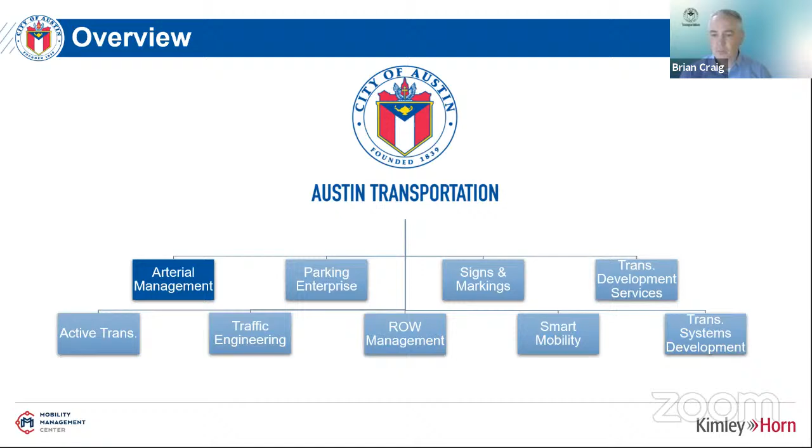I'm a little biased, but I do think that our MMC is the centerpiece of our department, both technologically and how we get to affect citizens' lives every day. Just as an overview of our MMC, we oversee a sizable number of critical arterials—roadways that we've deemed the most essential within the city. I think it makes up approximately 200 miles of arterials out of many, many more than that. We monitor traffic flow, we make timing adjustments as needed, and we do so remotely using the KITS system.

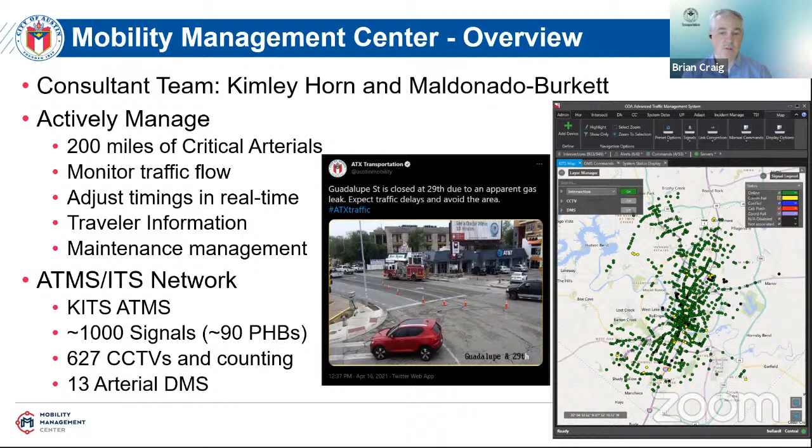A little bit of history of our MMC. Although this predates me, there was an election in 1986 in which, from the best that I can tell, was the first bond truly devoted to traffic signals. As part of that bond, we started deploying communication to our traffic signals, and that was, at the time, copper, as fiber really wasn't an option back then.

From 1986 through the 90s, it was really an expansion in which communication was brought to more of the traffic signals. As part of that, the city really standardized on the 170 controller platform, which was an upgrade from some NEMA cabinets, but also a lot of electromechanical systems. Communication to those traffic signals was great, but it certainly wasn't what we expect now as far as CCTV cameras or anything to that effect. Really, it all came into a very small office that was less than 20 by 20.

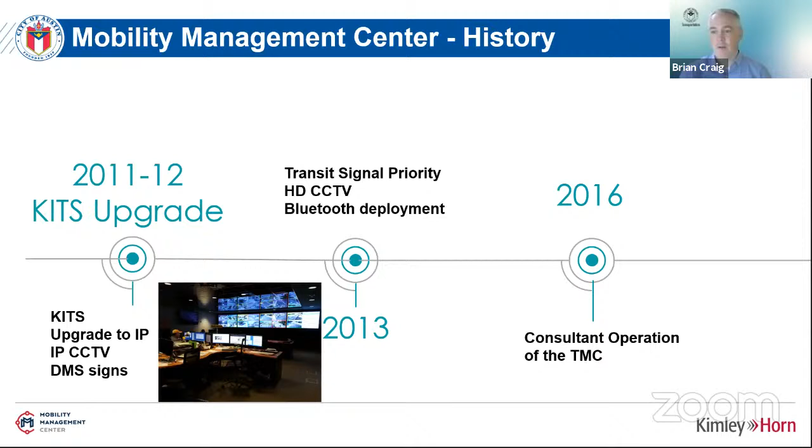We had been using KITS, and we incorporated our Next Phase software into it. But there were just a lot of things we couldn't do with the Next Phase software, which at that point was 15, 17 years old.

So in 2017, we put out an RFP to upgrade our signal firmware. At the tail end of that year, we selected D4 and began incorporating that into KITS, making some minor modifications with them.

2018, we're on the move. We relocated the TMC to a larger facility with all the growth within our division. We had outlived our old facility by probably a decade, so we moved into a larger facility with both our signal engineers and signal technicians. In the process, we rebranded our TMC to the MMC, Mobility Management Center.

We continued to make modifications to our new space, and we installed a new video wall consisting of 22 large 65-inch monitors. Strangely enough, that was a downgrade from our 80-inch monitors, but previous to that we only had 4, so we certainly increased our real estate.

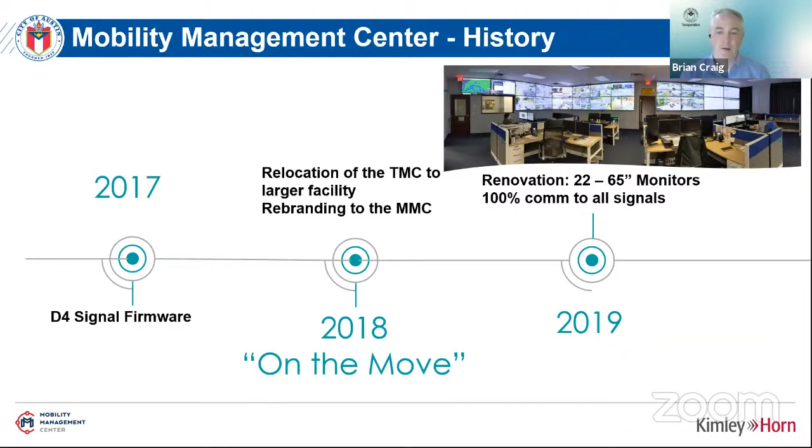And then 2020 hit. We all know about 2020, but prior to COVID, we had started an arterial coordinator program, and I think Lance will be able to touch on that a little bit. I don't want to say it was modeled under RTOP because it was much smaller than that, but it was really identifying 3 test corridors for us to pay more attention to.

That was in January, February, and then COVID hit, and we moved to remote operations. Late last year, Lance and some others started staffing the MMC again, so we're slowly getting back to normal.

This year we have some additional upgrades in the works: improving our video management system, video wall controller, and overall improving our situational awareness. In addition, we are revamping our communication network again to be more mesh-like, to distribute some of the high-def video we get from our 600-plus cameras.

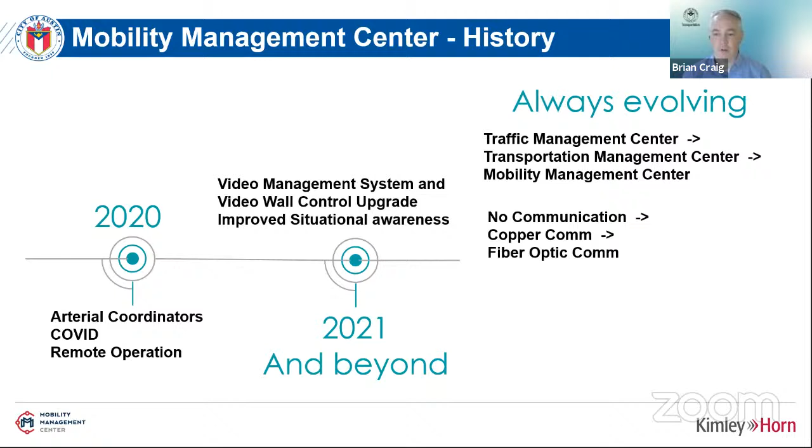Likewise, the way I look at it is you're always looking at improving. There was once a time where the only way to make adjustments to intersections in the field was to drive out there, and then slowly but surely we improved communication from copper to fiber optic. Now it seems like there's nothing we can't do, but as time progresses we will continue to make incremental improvements. Next slide, Lance.

So we have our normal day-to-day operations, but we also have special events, and we have our fair share of them within the city. We have numerous smaller events that go on, pre-COVID, on a weekly basis throughout almost the entire year. Really, the only time special events take a break is during the hottest parts of summer.

South by Southwest just engulfs downtown for 2 weeks in March. We have ACL, which is multiple weekends in the fall, and then there's UT football games. In about 3 weeks we'll have our first Austin FC home game, so we're all very excited about that.

We've also been having a Formula One race in Austin for the last 7 years, I believe, and this year we actually had our first NASCAR race. So we staff the MMC for all of those events, whether it be on the weekend or late night. Next slide.

PHBs. I think this is one of our more successful programs as far as the public goes.

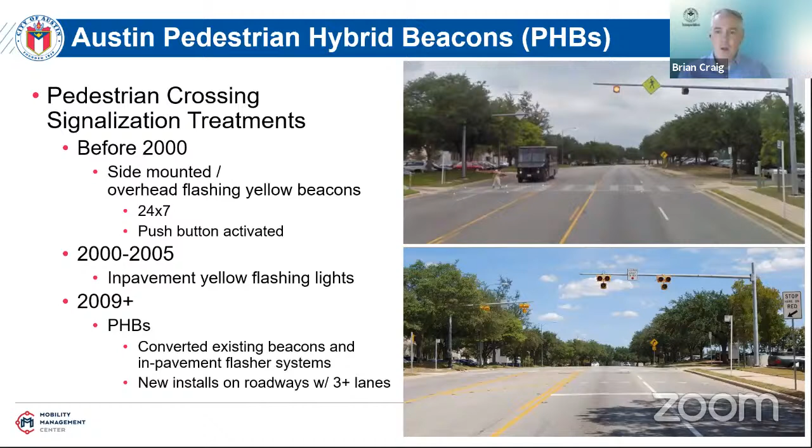So the MUTCD, I mean, you can read the definition of what a PHB is, but they provide very little guidance as far as how they should be used.

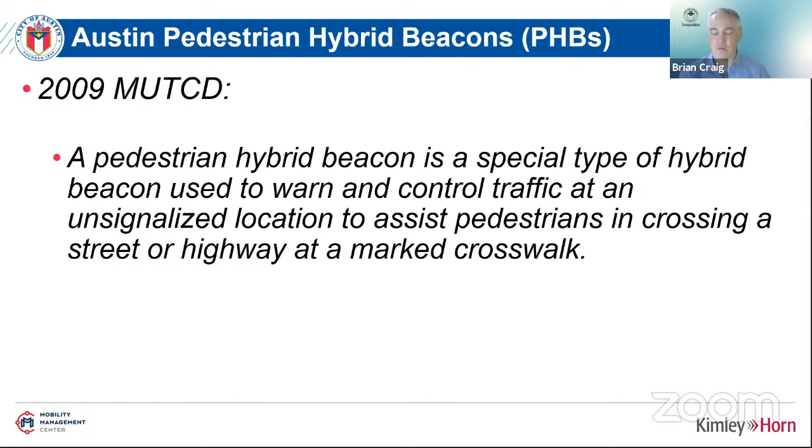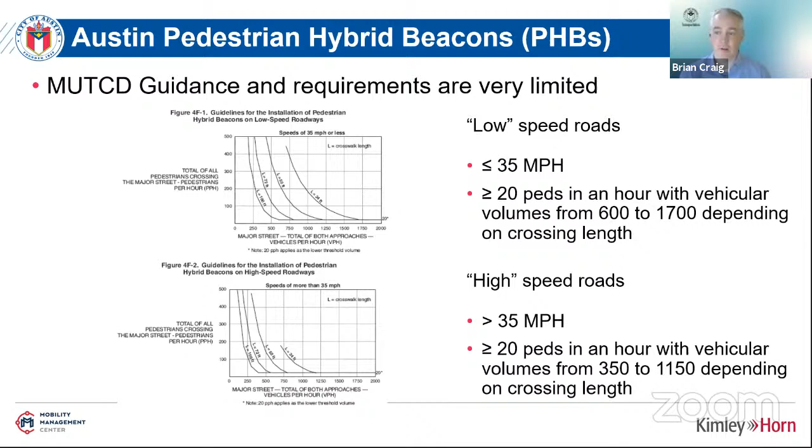So one of the things that became very apparent to us is most of the locations we studied did not have 20 pedestrian crossings per hour. And internally, we're asking ourselves, why were there so few crossings? And the answers were not enough gaps. I mean, realistically, if there aren't gaps for people to cross traffic, then people are going to find another way of getting across the street.

So as part of that, we really did some brainstorming, and we just decided that we like this traffic control. The public likes it. And so we just decided to use engineering judgment when we measured gaps, and there were fewer than 20. I mean, if there were less than 20 gaps in an hour, how could we expect there to be more pedestrians than that?

So really, we've looked at adjacent land use, the presence of bus stops, and future developments when we go ahead and put together our PHB studies. And we've been very liberal with our decisions as to whether or not to install a PHB.

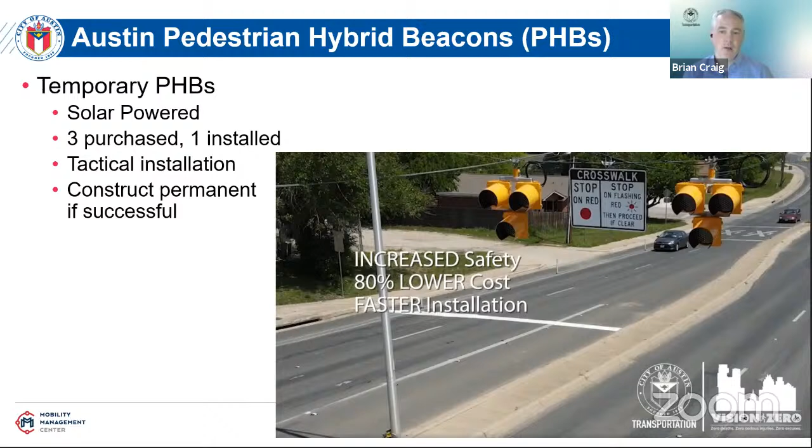Recently, we've actually procured 3 solar-powered PHB systems. We've installed the first of those at a location where we do have grant money to install a permanent PHB, but just based on the grant process, it was going to be another 2 years before construction would start. So we thought this would be a good opportunity to get one installed prior to that. And we have similar plans for the other 2.

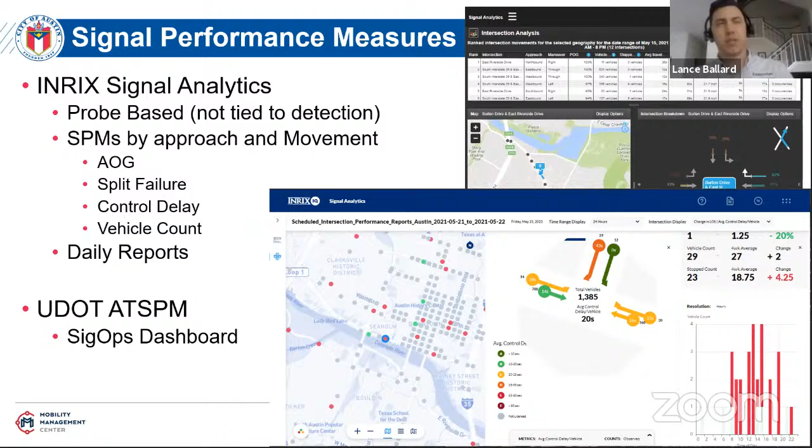Recently did a study on Riverside Drive where we were able to show that even though we took lanes away to implement transit priority lanes through some signal timing adjustments and things, we were able to keep traffic performing in basically a similar manner than before, and that's without having to reconfigure all the detection to get all of these statistics.

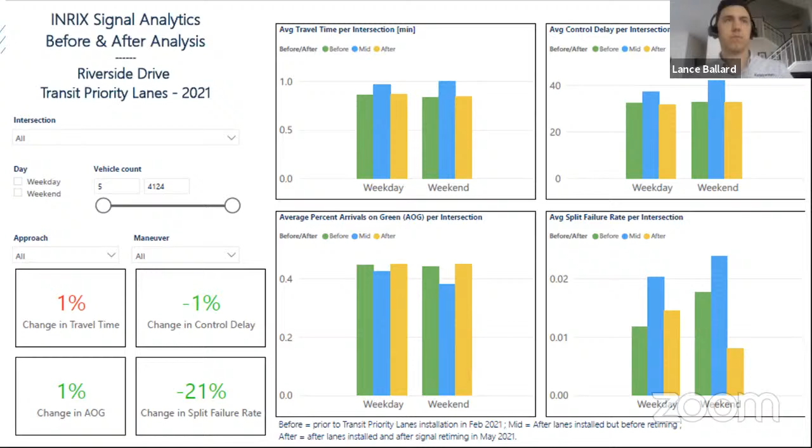We're also tracking—sorry, my headset is beeping in my ear that it is dying. If that is the case, I will try to switch over to microphone from my laptop. Hopefully that does not occur, but I'm sorry, I was distracted there for a moment. If that does, forgive me.

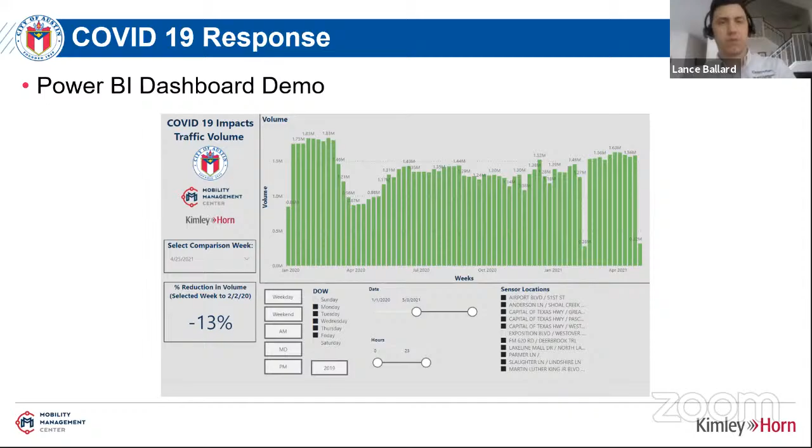Throughout the pandemic, we were using Power BI, which you just saw me showing with the Riverside Drive comparison, to track changes in volume, travel times, and all sorts of things for COVID. So I'm briefly going to see if I can do a live demonstration of one of those dashboards.

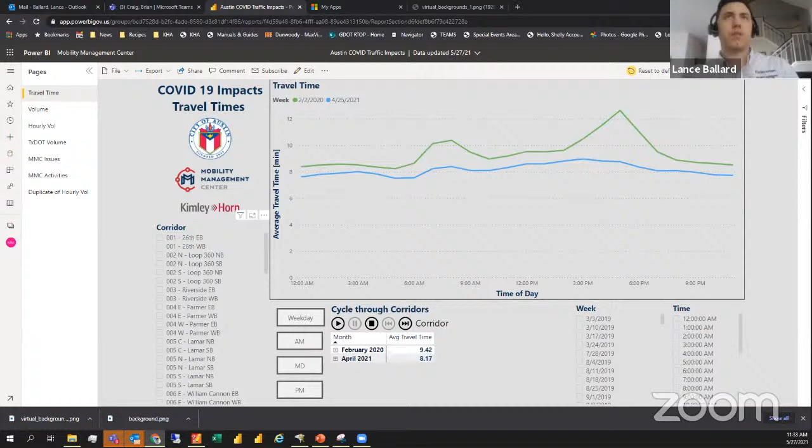Here you can see that we've pulled in lots and lots of data, more than you'd ever want to chew on in Excel. This is INRIX travel time, and we're pulling it in for all of our different corridors across the city to get average comparisons to the green baseline of February 2020 pre-COVID, and the blue line, which is a couple of weeks ago. I can look at specific corridors and compare them to see our AM peaks or PM peaks starting to come back.

I got tired of clicking through all those, so I found a quick way to just cycle through all of them. We're able to check this easily each week, and also report back to other parts of the department that control right-of-way permitting, construction coordination, and stuff like that, because we opened up the time that you could be in the roadway for construction during COVID, since we saw volumes decreased by roughly half at its low point.

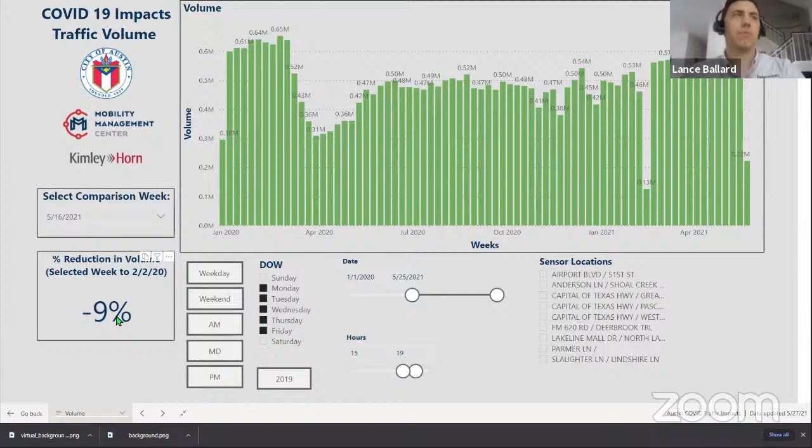Here you see volume week by week, taken from our GridSmart sensors across the city. We grab about 40 gigs of data each week when we run this, and it populates in this report. We can look at weekday versus weekend, AM peak, all those sorts of things, and see that we're roughly within 10% of pre-COVID levels. But if you look at just the PM peak, it's actually 9% right now as well, but AM is more like 25%.

So it's still down significantly. And if we look at that by hour instead of weekly bins over the year, you can see that AM peak just isn't what it was. This helps us do a lot of things—inform other departments that work with right-of-way permits, and also helps us within the Arterial Management Division in the MMC to adjust signal timing and get a better sense of where traffic is picking up, where it's still not back, more than just with our naked eye. We're able to do this quickly using this.

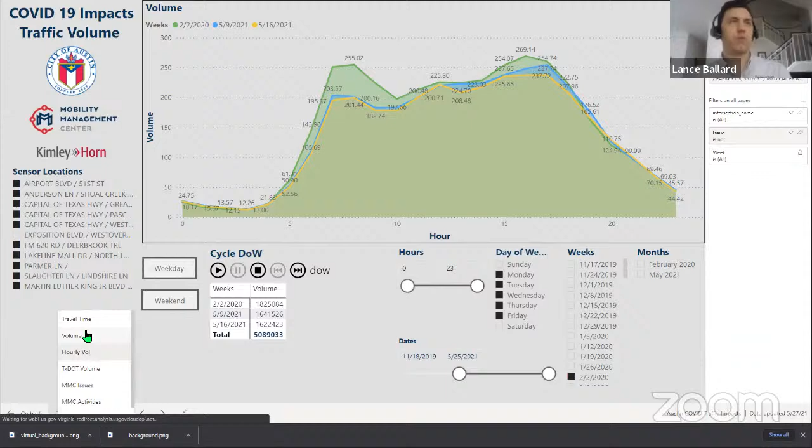When COVID hit and we had that huge drop off in volume in March and April of last year, we quickly used KITS to run alternative timing plans to about 85% of our signals—about 850 out of 1,000, so it makes percentages nice and easy. If you take the 10% out that are PHBs, it's probably even more than that.

So we were really aggressive in changing the timing plans to better accommodate lower volumes in traffic, so that we could decrease pedestrian delay by lowering cycle lengths and better fit our timing patterns to the actual volumes we were seeing out there. And since then, we're now at about 30% of our signals still running override plans, I guess you could say, during the AM peak period.

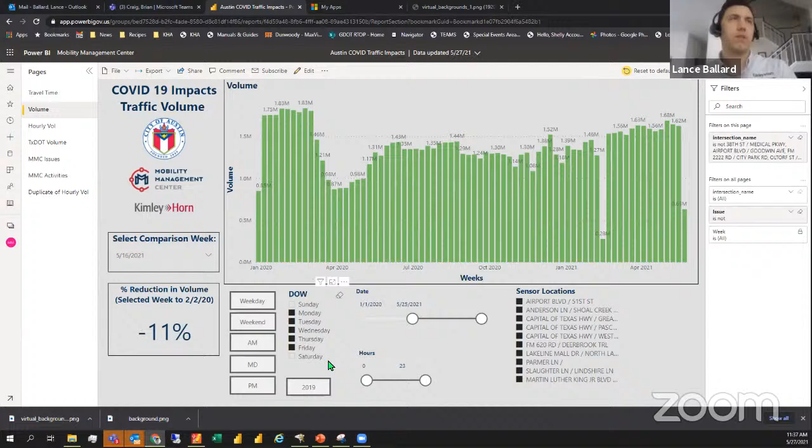While most of the city, pretty much all but downtown, is back to running its normal PM peak period, it's a little bit better fitting at this point. So Power BI has been a powerful tool for us to track COVID and do other things as well. Let me jump back into the presentation here and keep rolling.

In February, we were hit with a pretty dastardly snowstorm. I was there in Atlanta in 2014 for Snowpocalypse - take that and extend it for a whole week, and that's what we were dealing with. Nobody was really prepared. We were as prepared as we were for any sort of event, but Friday the 12th of February was our last day above freezing until the following Friday.

We had 7 inches of snow, which broke all kinds of records here in Austin. Had a low of 0. It was just bitterly cold. Power outages, water outages all across the city. People were asking us what's happening with the signal system. We're like, well, if it has power, it might be running. If not, it's going to be dark because no battery backup system will last that long.

It was really Thursday that things started turning back on, Friday in earnest. And we used Power BI to track a lot of that.

We linked it up with some of the data we were getting from KITS, and we could have a dashboard that updated every hour during work days, so management could see how many signals were currently in flash, how many dark signals we had, how many total were in flash, how many we'd restored. It was great for us as managers in the MMC to be able to quickly stand this up and share it, so we wouldn't have to spend as much time answering questions and catching people up to speed. We could be tactical, focus on resolving issues, getting technicians to the field.

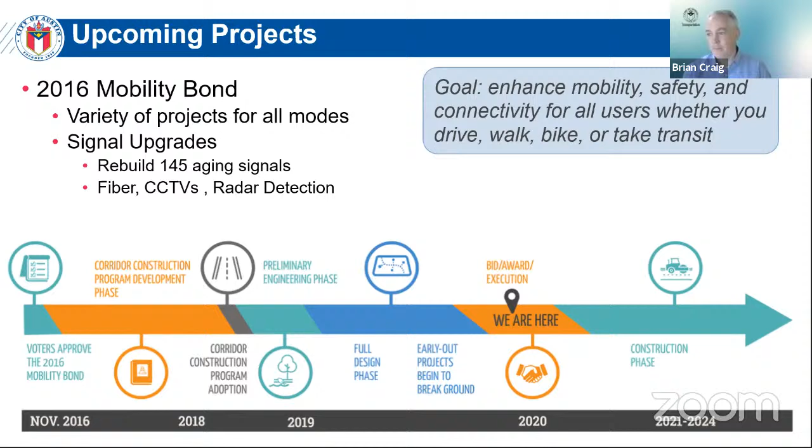Next slide. That's a project that's ongoing right now, and another project we're just about to get started on is the smart priority project, which will improve the centralized transit signal priority system we have right now, and completely rebuild, reimagine, our emergency vehicle preemption system. Currently we have about 100 intersections with the old-fashioned optical transmitter on fire trucks and emergency vehicles, and receivers at intersections. Ever since we installed those in the 90s, we've always had maintenance issues with them.

So when we rolled out our TSP system back in 2014, the proverbial light bulb went off: why can't we do this with fire trucks also? Through various conversations with them and digging down, they all have AVL systems on them, already tracking their vehicles. So we're working with them on a centralized system where we'll get their location data second by second, so that we can preempt signals through our own servers, communicating with the traffic signals through our own fiber optic cable. We won't need any type of hardware in the field to do that, and we see no reason this won't be a citywide program.

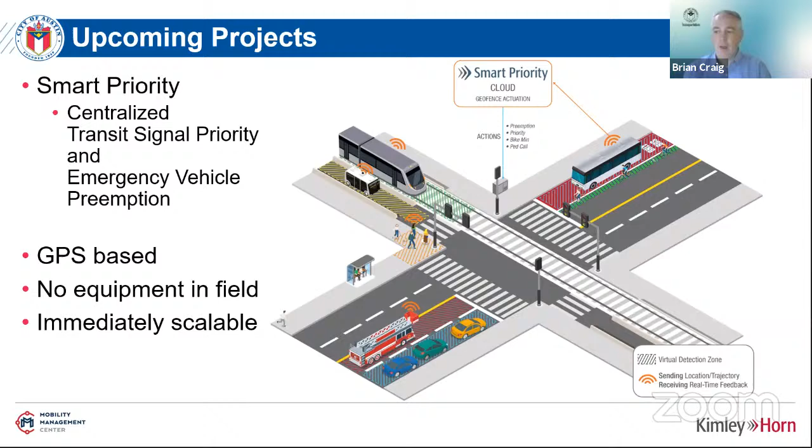Next slide. And then, of course, the biggest one of all: last year we had a rail election that finally passed. We've had numerous ones previously that failed, but this is a $7 billion bond for multiple rail lines and new BRT routes, and this is just going to be one of those things that keeps many people active on the project for most of their career at the city. Because if it's like other rail projects throughout the country, by the time we're done with this one, I have little doubt there'll be subsequent elections to expand it. But those are some of the projects coming up that will be keeping us busy.

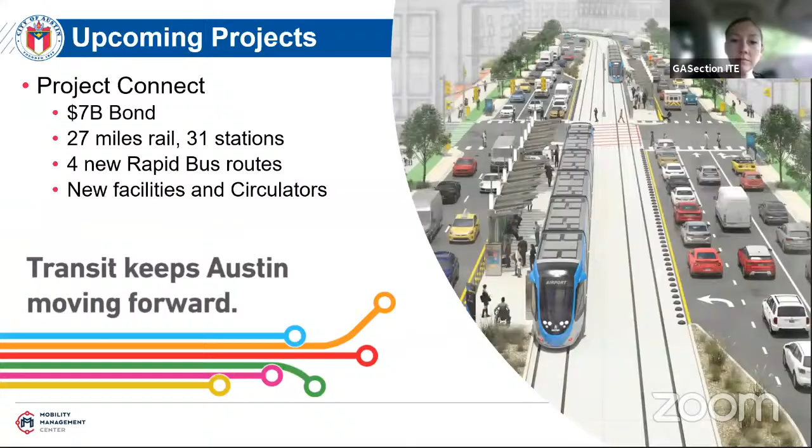Yes, it's one of those things where trends in pedestrian crashes aren't very evident. Thankfully, unlike vehicle crashes, there are very few pedestrian crashes, so there typically aren't any trends at the location we put PHBs at, is the short way of putting it. We certainly have put them at locations where we've had a fatality, but unlike vehicles, there generally isn't a telltale sign that there are ongoing crashes at this location. Most of the time, it's more of an observation where it's difficult for pedestrians to cross the street.

In the city, we have a Vision Zero group that actually helps look at a lot of these things. It's not just us doing crash studies. We have access to the crash data. Some of the reports we're pulling in for that Arterial coordinator program in Power BI have crash data next to detection data, next to signal performance data. So we're looking at that, but they're also coming to us and saying, hey, we're seeing this, can we implement different solutions? Some of those are pedestrian crash locations and our high injury network corridors, so we've got some help doing that as well.